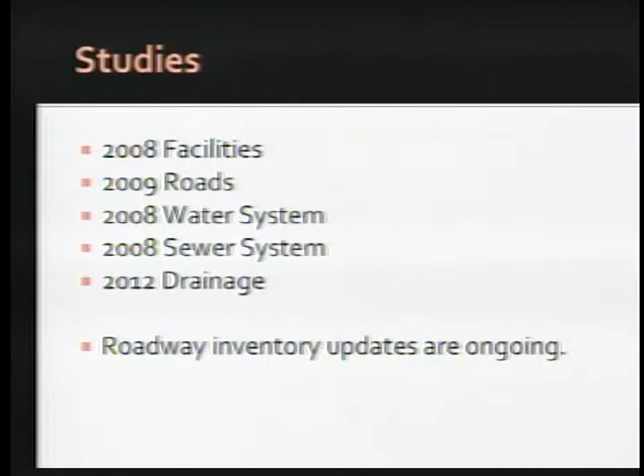The purpose of these studies was to bring in engineering professionals to review some of our systems across our community and to issue back a report to the town stating the current condition and what the needs were, looking down the road 15 to 20 years. So there's a tremendous amount of information in these studies. It's long reading, but these studies are online. They're on the town website. If you drill down into Public Works or even on the Select Board page, you'll find many of these studies.

In our town, we have major resource groups. We have buildings, we have roads, we have water systems, we have sewer systems, we have drainage systems, including dams, we have sidewalks, and we have landscape/open space. The landscape open space is basically everything that you see with your eyes as you drive through the community.

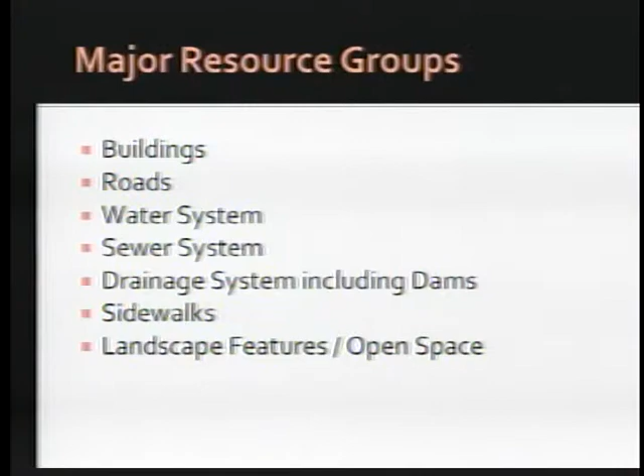Buildings. Buildings as an actual resource group is a large amount of our commitment to money in our community. As structures age, components require replacement such as heating systems, roofs, plumbing fixtures, and other items prone to wear and tear. All structures have an estimated life cycle. At the end of a structure's life cycle, it may be rebuilt or rehabilitated. Now, that brings up an interesting question, why some structures you can actually go back and rehabilitate cheaper than you can rebuild them. It really depends on the type of structure, the utilities and stuff that's in the walls, and the actual makeup of the whole building.

A typical warehouse may last for many, many life cycles because you can just basically replace everything inside. It's not concealed in walls. You can put a new steel structure on the outside. You can put a new roof on. So your steel membrane is never going to stop. When you get down to a brick and mortar type structure, you can do a lot of inside work, but when you get to the outside fabric, the mortar starts to deteriorate 50, 60 years down the road, especially with acid rain and the different rain elements getting in it.

And so you start to escalate the cost of rebuilding it. If you had to tear off the entire brick facade on a building and rebuild it, it would likely be a lot cheaper just to start over and build new. So that's a decision that's made by the engineering staff based on the type of building, and these are some of the things that we will go towards as we go down the road.

Now, we recently rebuilt the high school. It's brand new. The high school now will be in place for 50 to 60 years, somewhere in that range of cycle. But in the interim, we will be doing a lot of major structural repairs to it. The roofs, we may actually have to do replacement windows. We'll have major structural things inside, but the core structure will likely last 50 to 70 years, somewhere up into that range. The performance of routine and preventative maintenance will ensure an adequate life cycle on any structure.

It's a very important part of this puzzle. If you have adequate routine and preventative maintenance, your life structure on a building will live its intended purpose. If you do not have adequate preventative maintenance, you will quickly see the structure fail early, and you'll start to have catastrophic spot failures. You'll be reactive in maintenance. It will cost you a lot more money.

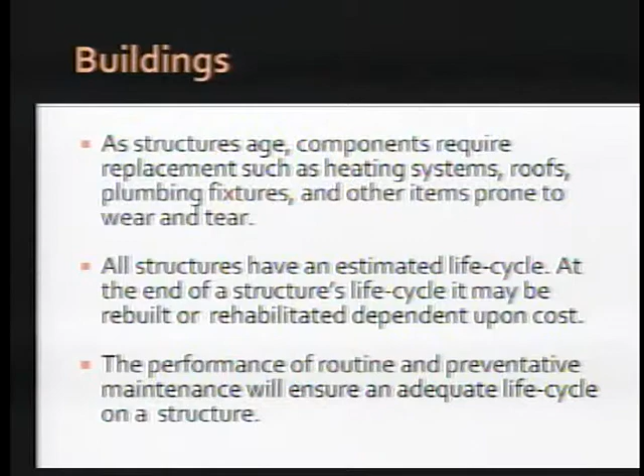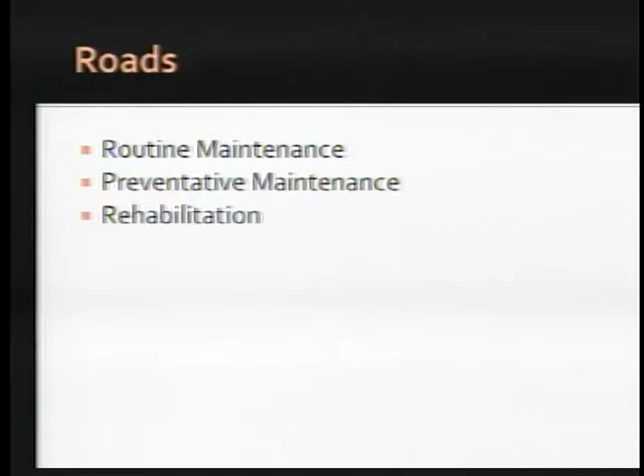A road surface over time will fail, it will crack. The asphalt starts to dry out, it becomes brittle. The UV damage from the sun affects it, and it actually will crack. This can also be caused by soils movement underneath the asphalt. Swelling and contracting will actually force it to crack also. So what we do, we seal these cracks to prevent moisture from getting into the subbase on our road.

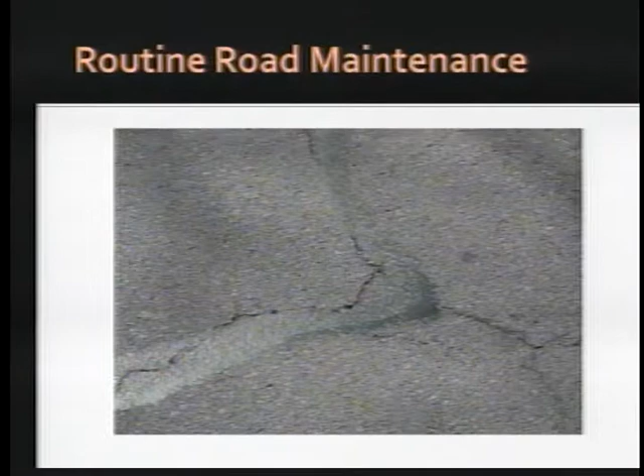Undoubtedly, moisture is the #1 enemy of any road surface out there. If we can prevent the moisture from getting into the subbase, the road will last much longer. We will likely get a good life cycle on it. This particular slide shows a combination of failures starting to take place. Now, obviously you've seen this around our own community. There's some large block cracks, and then there's some kind of multiple cracks along the lines where the tires actually hit the road.

Now, in a normal repair sequence, you notice this road does not look like it's been crack sealed, so this one has not had the adequate routine maintenance, so now we're moving into a preventative maintenance mode. Now, we've already shortened the life cycle on this road bed by not doing the first maintenance, because now we're allowing water to get into the subbase, and it's further cracking the road base.

Now, when you look where the wheel marks are, where the actual vehicles are, you'll notice there's much more deterioration taking place. That is because that is where the weight of the vehicles hits the road, and if the water is in the subbase, it starts to lose its structural strength, and it can crack the pavement with the weight of a vehicle. This road here is at the point where it can be salvaged now with what we call a mill and an overlay.

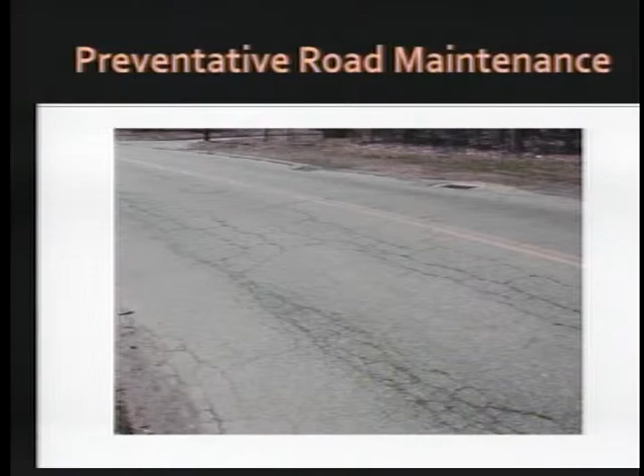A mill is you have a big milling machine that comes in, it takes off about 2 inches of asphalt, and then in turn, when it's done, you put down a brand new layer of 2 inches of asphalt. And then your road basically has been rebuilt to a certain point in time where you'll get a future life cycle out of it. In this case, we will have to do some more structural repairs where the wheel marks are, because that's going to require cutting the asphalt out, actually going in and redoing the base in under there to provide structural strength for the overlay.

I would like you to think of a road base as a sponge, the very hard type of sponge that you may have around your home, that when you press on it when it's dry, you can hardly compress it, but when it's wet, it compresses very easily. This is the same thing that happens under a road bed.

If water gets into the subbase and vehicles go over the top and the asphalt structure is not sufficient enough to hold the weight of the vehicle, it will actually start to push down the asphalt. It'll crack the asphalt, and it'll pump back and forth on the moisture that's in the soils below it. And what happens, the fines, the particles in the soil it supports, actually start to wash away.

Sometimes you'll see mud streaks coming out of cracks on a roadway, and this is the fines or the mud coming out of the road. This is a sure sign that you've got water there, and it's a sure sign that the asphalt is moving, and potholes are just around the corner in this case. But this is the worst type of situation you have. This is also the most expensive situation you have for repair.

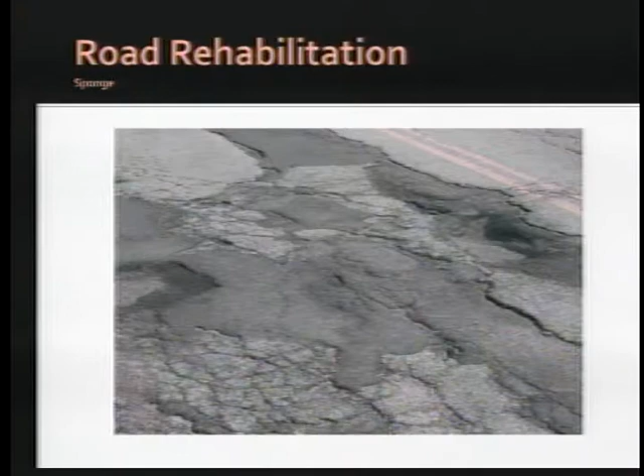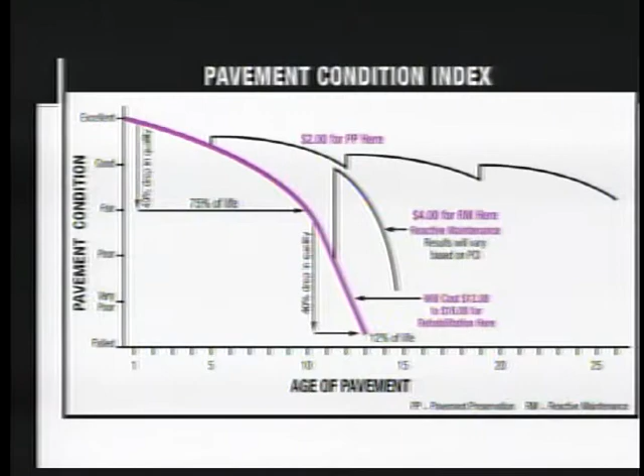Also crucial is the original design, the drainage layouts and the structure of the road. If it's not built to take the structural load that we're placing on it, it will fail prematurely.

Excuse me, approximately 95.4 miles of roadways in town. Our roadways are broken into 2 sections. 25% are arterial, and that is your main roads like Bliss, Longmeadow Street, Converse, the major arteries where you see most of the trucks. 75% are residential streets. That's back in front of your house and my house.

Arterial roads will generally last 10 to 12 years. Of course, there's a lot of factors that go into this generalization. This is with adequate maintenance also. Residential roads, you'll have to repave them every 12 to 15 years. Sometimes you can push a residential road a little bit farther out because you don't have the heavy truck loading. You have residential traffic. It will crack, it will need preventative maintenance, but it will not start to form potholes like you get out on the main roads.

Standard mill and overlay, as we mentioned before, at this point runs about $250,000 to $300,000 per mile. And this does not include utility work under the roadbed. This basically says we're going to do some minor drainage improvements. We're going to mill 2 inches off, and we're going to replace it and go ahead and do all of our crosswalk, signage and all that going down the roadbed, as opposed to a total reconstruction.

We're coming up and we're going to do some major work on William Street this coming year, where we're going to actually do the drainage work down and under. We're going to replace some of the drainage pipes. We might be replacing water pipes, as we just did down on Maple Street, and the sewage lines. This is when you get into the major work. Your $250,000 to $300,000 range quickly goes up to $400,000 to $500,000 to $600,000 range minimum when you start doing major utility work.

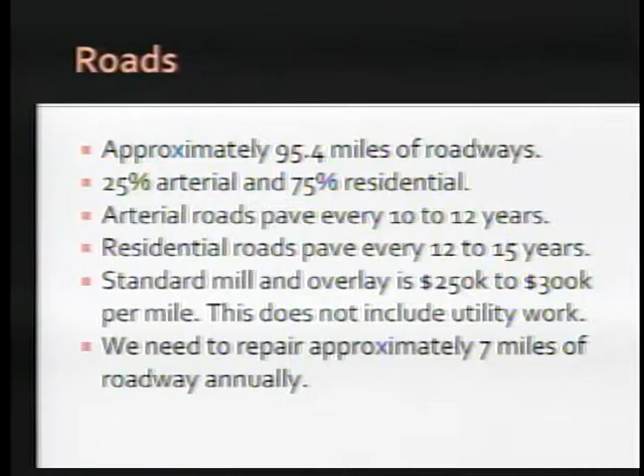We need to repair approximately 7 miles of roadways annually. This is based on the anticipated life cycle of the arterial roads and the residential roads. We right now are likely doing less than 1 mile. We have some money in our base budget towards asphalt, and we also get the state money, which is coming in at $450,000 a year. I believe this year we're on tap for a possible increase to $750,000.

Our water systems. Our water system is comprised of 99 miles of water lines of various sizes. Our system has 5,700 meters and 1,100 fire hydrants. 35% of our system lines are 4 to 6 inches. This is a problem. The 4 to 6 inch lines at one time were perfectly satisfactory for a community of our size. As we have grown out, the standards have changed, and now the current standards, you want 8-inch water lines running through your residential areas, not only for service of proper pressure to the homes, but also for fire protection.

Now, we have some areas in town that have the 4 and 6 inch lines. The 6-inch lines have been tested. The pressure is great enough that we won't have any problems for fire protection. And in the case where we have a couple of sections of 4-inch lines left, our fire chief has alternate plans set up so he knows if he has to go into a community with a small line, he will pull water from another area. They've worked it out. They have advanced plans. This is in process as we finally get the money up so we can replace these 4 and 6 inch lines.

Over the years, water lines will corrode, and they will also become blocked with mineral deposits. This is a very, very natural occurrence. It takes place in every water system in America. You'll notice as you go through the community, you will see the Department of Public Works out flushing our fire mains. They're not really just wasting water, folks. They are flushing the mains to get the impurities out.

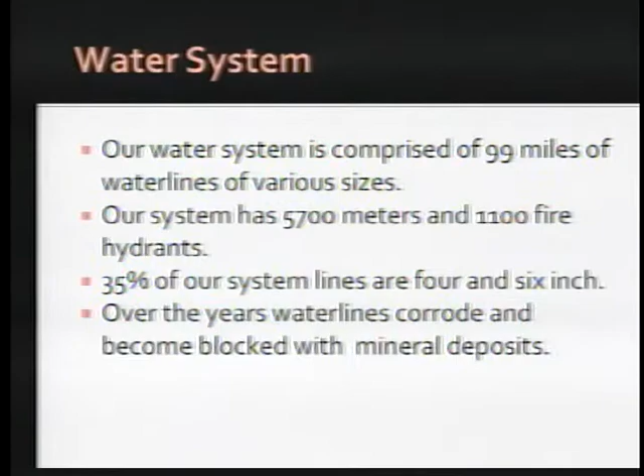When they open a major valve like that, it allows some of the sedimentation in the lines to be flushed out. This also keeps our pressures up in case we have a fire. We can have full capacity lines. So I realize there's a lot of water expended in this process, but periodic flushing of our main arteries through town is a mandatory process of maintaining a proper water system in our community.

Sewer system. We have 83 miles of sewer lines and 2,100 manholes. Most of the sewer lines are 50 plus years old. Sewer lines are a little different than water lines. These lines are subject to root intrusion, misalignment, leakage, and infiltration. Infiltration would be rainwater going down and getting into our sewage systems. A lot of the sewage lines, because they're gravity flow, except for the pressure ones, are made with looser joints, especially over the years. A lot of it is old terracotta pipe. And then you have cement pipe and asbestos pipe.

There's a variety of different pipes, down to cast iron and everything else it's used for. But generally speaking, a lot of the old sewage lines can experience leakage. Like our water lines, these lines will need replacement and rehabilitation. And when we're talking about our sewage system, we have some inherent weaknesses in our system, and I think I'll touch on that a little bit later.

One of our main problems right now is the north interceptor coming down the north end of town. It's between our town and actually Route 91. It's inaccessible by many points, and Mike will be planning in the next couple of years to replace that interceptor line. It's going to be about $1 million to replace that line. Right now, as I say, some of it's up on piers, and they'll be doing some redirection so they can get in to do proper preventative maintenance on it in future generations.

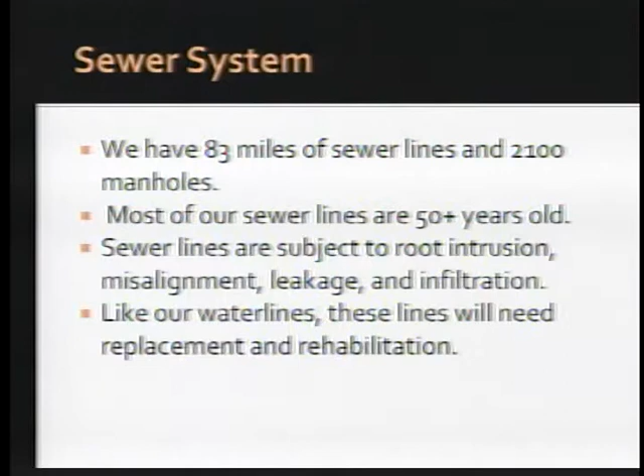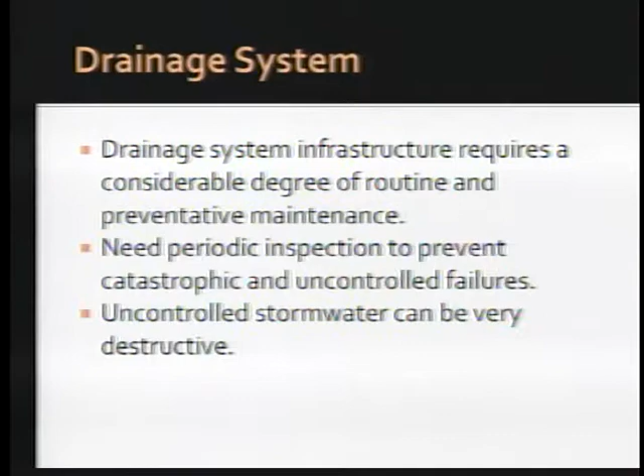Drainage systems. Drainage system infrastructure requires a considerable degree of routine and preventative maintenance if it's to be kept operational. It needs a lot of inspections to prevent catastrophic and uncontrolled failures. Uncontrolled stormwater can be very destructive. As you've seen, flash flooding and all, once water gets loose, it's very aggressive on the landscape. It can take large amounts of siltation and yards away once you get a line that breaks out.

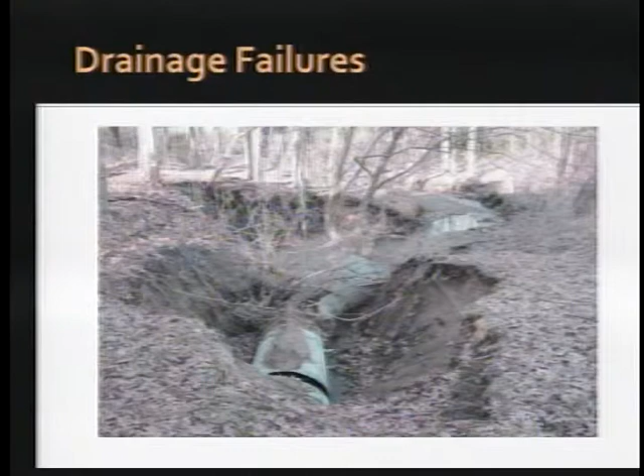This is a typical failure of a drainage system. The pipe that you're looking at, I didn't measure, but they say it's at least a 2-foot pipe. And you can see the amount of dirt that's been scoured out as this line started to open up and spewed the stormwater. This is gravity feed water, but based on some of the storms we are receiving, millions of gallons of water can be flowing towards the Connecticut River from our town. And this is what happens when you have a lack of maintenance or you have a catastrophic failure.

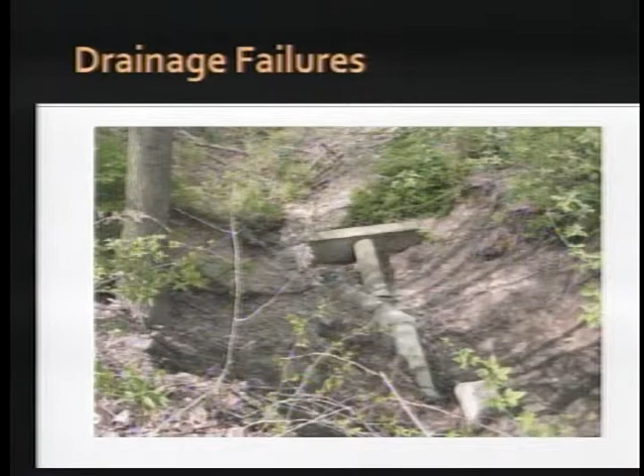After that, each successive section just kept eating away more and more soils until it actually backed up all the way to the top one that you can see. We've got 3 sections of failed pipe, and then the top one is sticking out of the ground, and if not corrected, it will keep eating the soils away until it hits a point where it can no longer aggressively take the soils away, or it hits the point of origin. This problem, by the way, has been solved in our community.

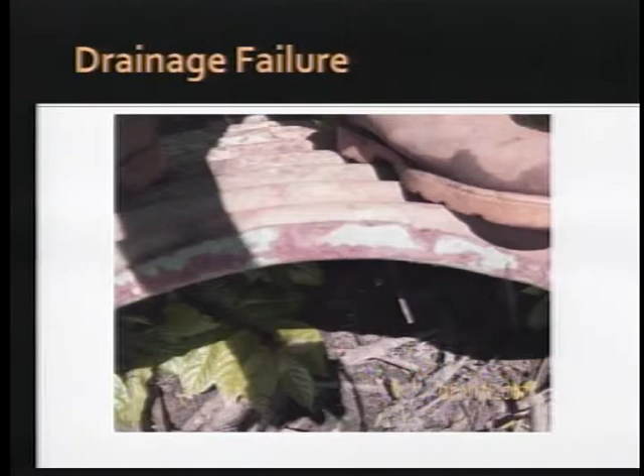This is an interesting slide. This is likely a 24-inch pipe, and you can see the shoes of one of our workers standing on top. I would imagine this was our drainage inspection crew when they were out checking our systems, and this pipe is totally dysfunctional. It is totally silted in. You can see there's even organic stuff growing actually in the pipe. So all of the water that originally flowed through this 24-inch pipe is now being diverted somewhere else.

These are the items that Mike needs to be out and be able to address. You may have noticed this last year, he's repaired several of them on William Street, and they currently are replacing a bad one on Longmeadow Street down towards Enfield.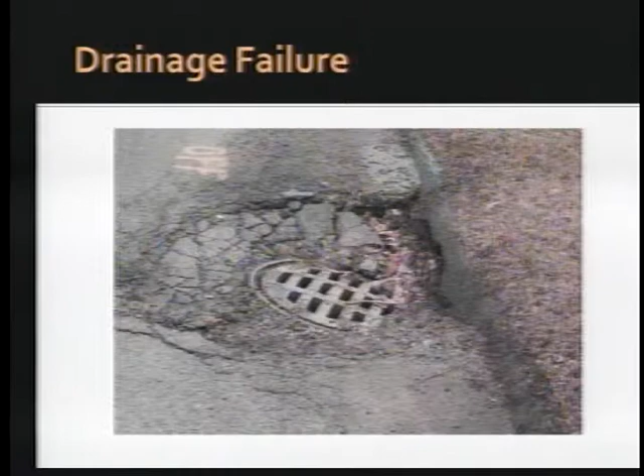Sidewalks. We have over 70 miles of sidewalks in our town that provide recreational opportunities and also play a vital role in accessibility. There are very explicit guidelines for repair and upkeep of sidewalks in public areas. Asphalt used on concrete sidewalks is for temporary emergency repairs only. It should never have been placed out there and left in place other than in an emergency. Again, this is a very large infrastructure problem that we have in our community. It's very difficult to keep our sidewalks in top-notch condition without sufficient funding.

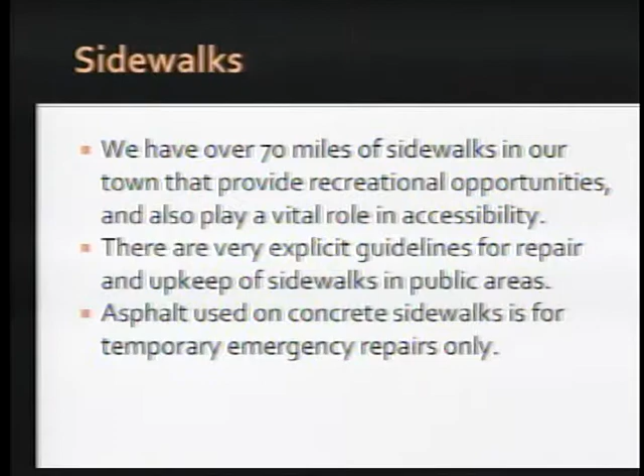This is a typical sidewalk failure in our community. This one is on Warren Street, and I picked this one because this shows a couple, 3 problems. It shows a tree that likely should not be planted where it is, and it shows the result of that tree planted where it shouldn't have been, an upheaving of the sidewalk. This sidewalk actually is likely 9 to 10 inches peaked up, and you can see they filled in the one side with asphalt.

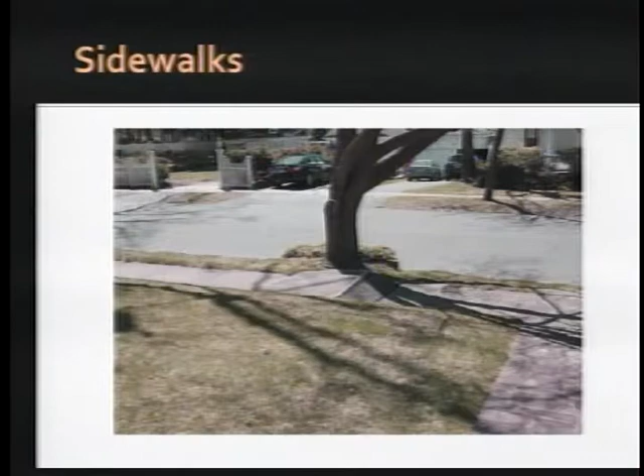There's no cure on this, folks. I mean, you have to take the sidewalk out, or take the tree out, take all the roots out, and redo the entire sidewalk, and then never plant another tree there, or especially a variety of tree that can uproot a sidewalk and damage an asphalt surface.

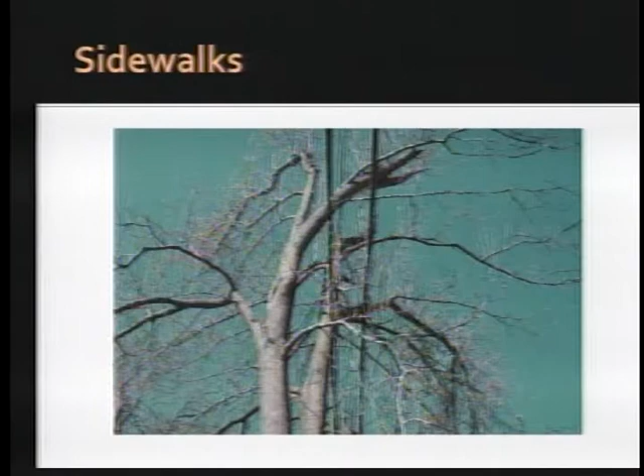This is the same tree. I just turned around and shot a picture up in the air. These are the utility lines going through the top section on the tree. This is not a pretty picture by any means, and it's kind of dysfunctional because when we had this ice storm, we found out what trees can do around our utility lines.

This again is the same tree. I would imagine this large section of the tree was lost when we had our October snowstorm a couple of years ago, the ice storm and all. This tree shouldn't be there. It's ill-placed, at least the variety of tree.

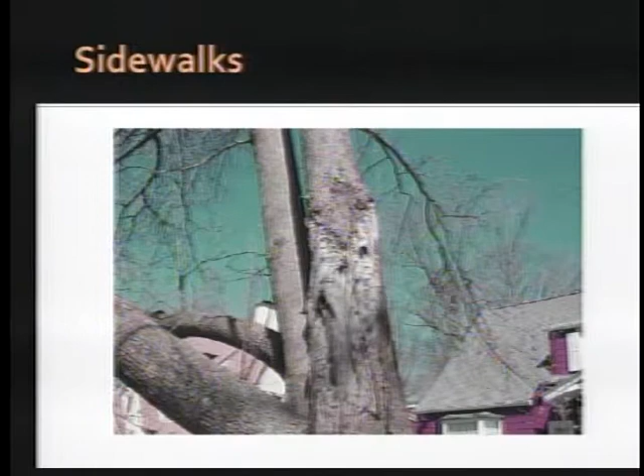As you go through our community, you will see this at numerous locations where the sidewalks have been damaged by some of our beautiful trees. And they are beautiful trees, but they're in the wrong spot if we're going to have a sidewalk with them.

Landscape and open spaces. These are the spaces all through our town where visual quality plays a crucial role. It's what you see when you walk through the community. It's the impression that you receive. The condition of our roads, sidewalks, and the general view shed represent our community. Folks, let me repeat that. The condition of our roads, sidewalks, and the general view shed represent our community.

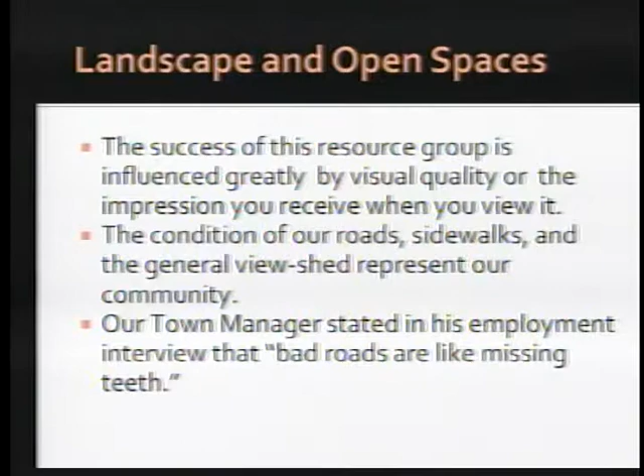I know we have wonderful people, we have wonderful businesses, we have wonderful schools, but the general public, when they drive through a community, they will look at certain factors to do an evaluation on a community. Our town manager stated in his employment interview that bad roads are like missing teeth. And at that point I told him, we have some missing teeth. It's a visual quality thing.

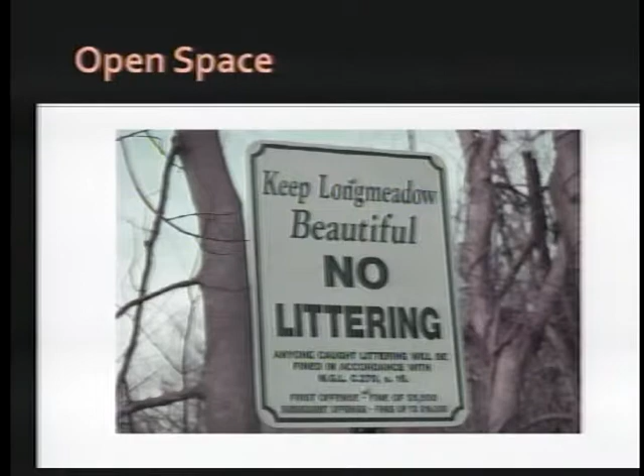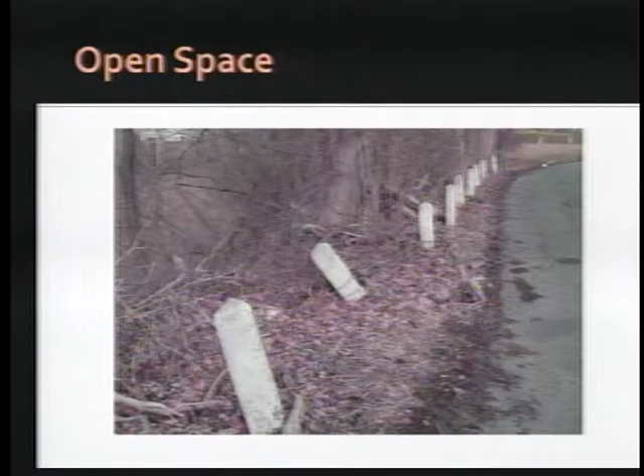Now the next slide I'm going to show you is going to show where this sign is located. This is the same parking area. This is the condition of it this spring. You can see our guardrails are beat back, they're pushed back, there's debris all down through, there's trees, and all the way down at the end of the parking lot, if you can see that black sliver of pipe, that is the actual sign that I took the picture of. This is visual quality, folks. This shows what our community is like.

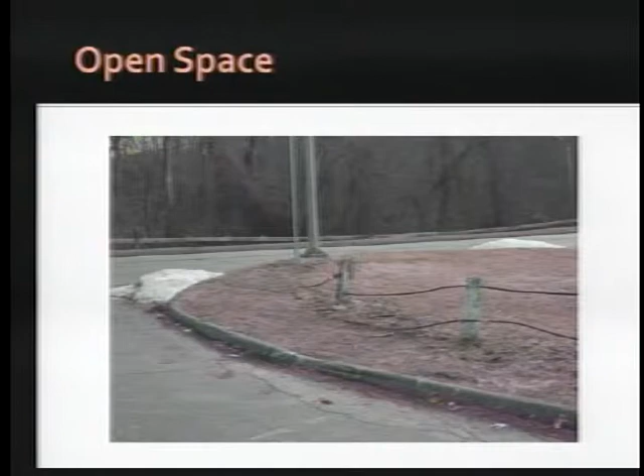This again is visual quality. This is at the same location. This guardrail assembly took years to fail. It's been years failing. The concrete has totally dissolved, presumably from the salts that we use on the road, which is normal. But this is non-functional. It's an eyesore in our community.

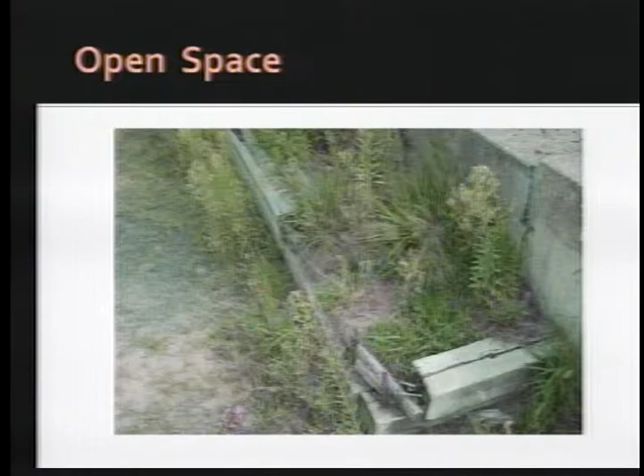This is up near the tennis courts, up near the high school. This again is just, I hate to say it, but it's a lack of maintenance. We've got some pressure treated timbers that have totally failed. They've left exposed rebar. Visual quality. These are some of the factors that affect our total quality of the town, the visual aspects.

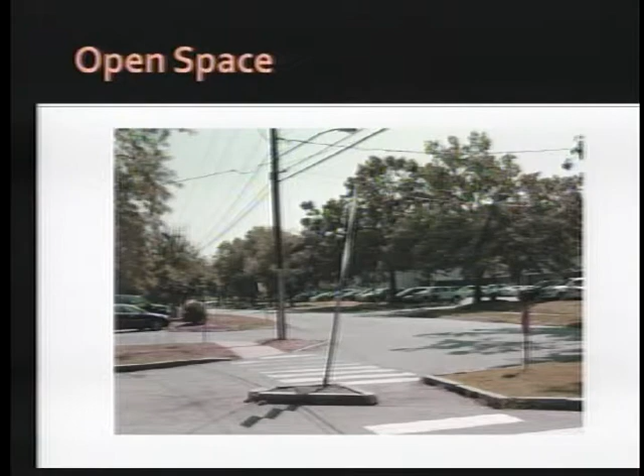Resource needs. These prices represent some of the known factors at this point from our engineering studies. You have heard during this political time of the year a lot of talk about us not having an infrastructure plan and not knowing what we're doing and not knowing where we're going.

I can tell you from my point of view, we have a lot of resource information. We have a lot of studies. We know exactly where we need to go. The only thing is we do not have the money to get there. That is the one problem that will have to be worked on this year and the future years, is how do we fund the resource deficiencies that we are already aware of in our community.

Currently, we have an estimated $27 million backlog in our road system. This is based on the study that was done in 2009 and has been updated since. Remember, we went back to the asphalt curve. We know what the asphalt is doing. We know it will fail if it's not maintained.

We need approximately $3 to $4 million a year being spent on our road system. This is above and beyond routine maintenance. This is the $3 to $4 million that needs to be put in the 6, 7, or 8 miles of new asphalt that we need to replace every year.

Our water systems currently have $55 million worth of identified deficiencies. Replacement of 6-inch and 3-inch or 4-inch water lines is extremely expensive, because quite often they're under the roadbed, so they're coupled in with a major road project, so it gets quite expensive to do that type of work.

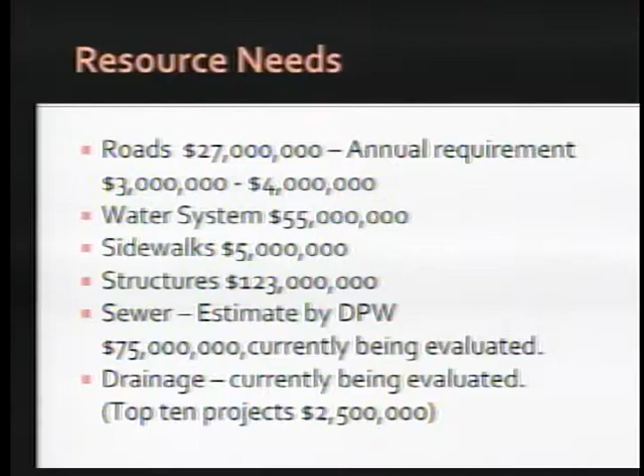The money part. The average home value in Longmeadow is $342,000. Just for information's sake, a $1 million override would increase the tax burden on an average homeowner by approximately $168 per year. But keep in mind, our current identified deficiencies are well in excess of $200 million. This is the size of the problem that we face in the community, is how do we repair our infrastructure, keep our tax base in line, and still move forward.

In conclusion, we need to increase our capital improvement program to $4 to $5 million. We currently spend $1 million or 2% of our revenues on our infrastructure improvements. This figure was arbitrarily selected several years ago. The figure was not correct at that point, and it's not even close to being correct now.

If we looked at national studies, international firms and national firms figured that they need 2% to 4% of the appraised value of their property being devoted into preventative and routine maintenance every year. In our case, we have a $1 billion resource in our community. We would need $20 to $40 million to properly maintain our infrastructure. I realize, and you realize, we are never ever going to have that much money. But if we can throttle back and start to balance our expenditures, we will start to make improvements towards our infrastructure repairs.